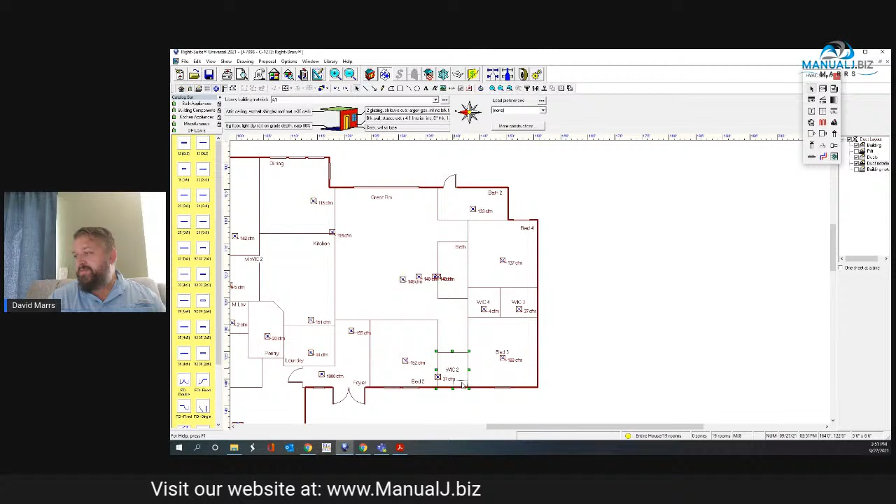I'm going to have a lot of ductwork showing, kind of coming up to the middle of this house, so I want to make sure all that is completely not there. All right, there we go. Just a few more. Get that up there.

Now I'm going to go ahead and put these grills where they're supposed to be. I know some of you are saying those grills are supposed to be right there in front of the windows, not everywhere. Everybody does it a little differently in different regions across the country. Some areas put it right up on that window, and others put it back, having it blow towards the window.

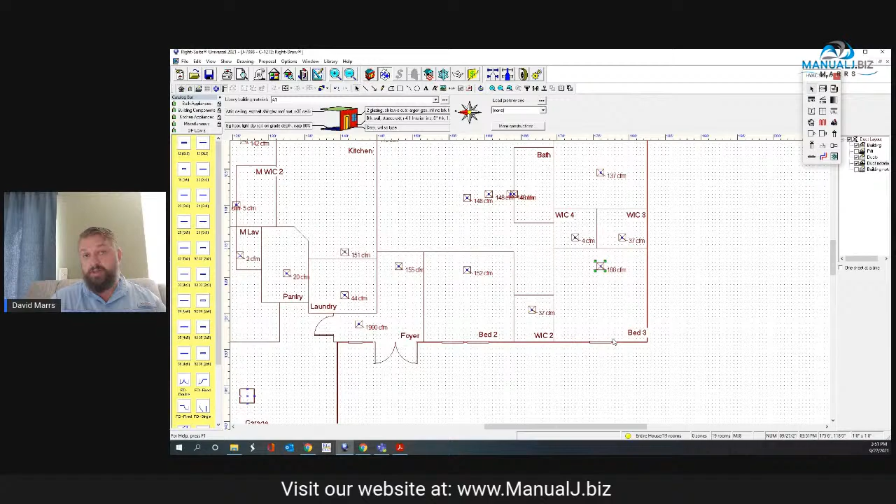Now, from my experience, which one is correct? If you're from an area that puts it blowing towards the window, you're going to say you're correct, and if you're from an area that puts them at the window, you're going to say you're correct. But truth be told, both work. I might gain a lot of haters for that one, but they both actually do work.

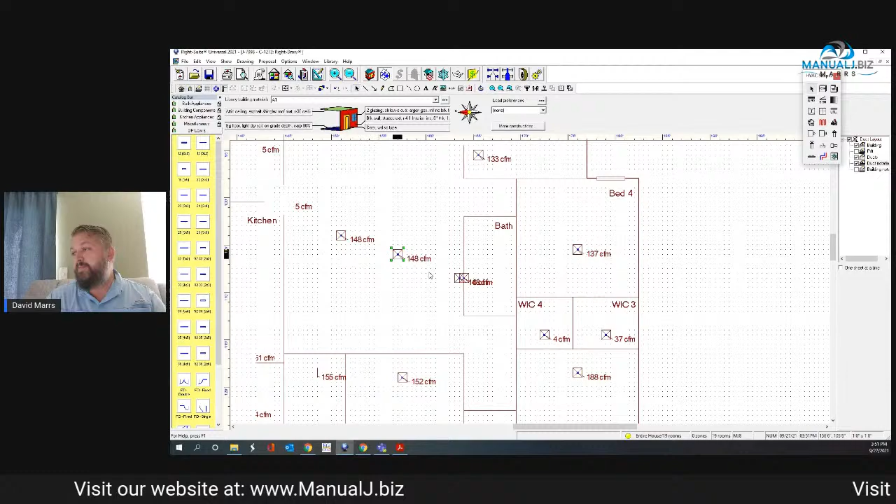All right, let's go ahead and put that there. That one there.

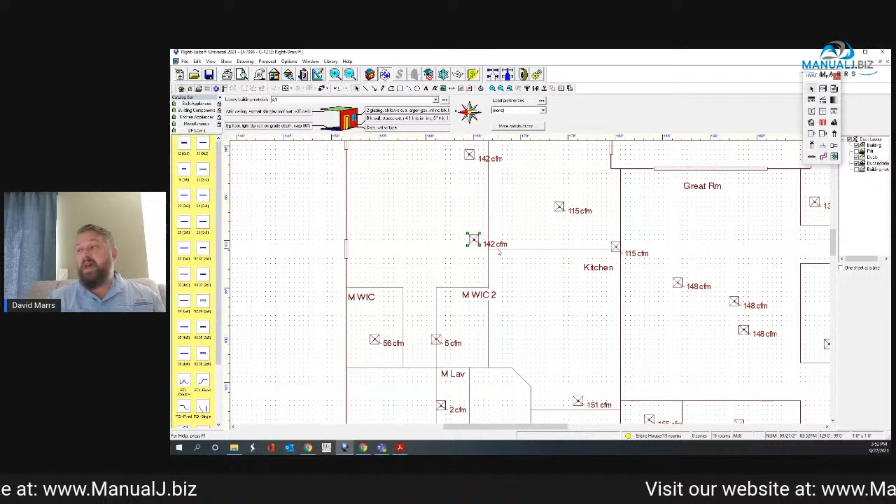In this one, I'm also making this more schematic than anything else. I'm not looking for exact locations with this particular builder because I don't have a truss plan. If I had a truss plan, I'd be able to see exactly where the trusses were located and put those things right where they need to be. This, I just need to be within reason. I can't be stupid about it, but I need to be right there within reason of where it needs to be.

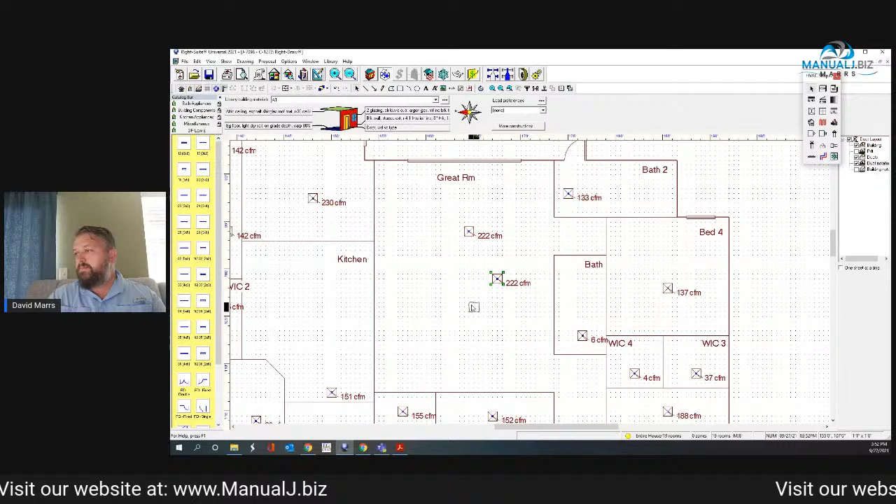Just getting rid of some extra ones that I don't need. All right, and that looks halfway decent.

Like I said, this is just to be quick about it and not 100% exact. There are plans that we do that are 100% exact, spot on exactly where the duct layout is going to be and where the grills are going to be located, because everybody does things a little differently and likes their work shown in a different way, and we cater to that. We make sure that whoever you are, contractor or client, we get it exactly how you want your work done.

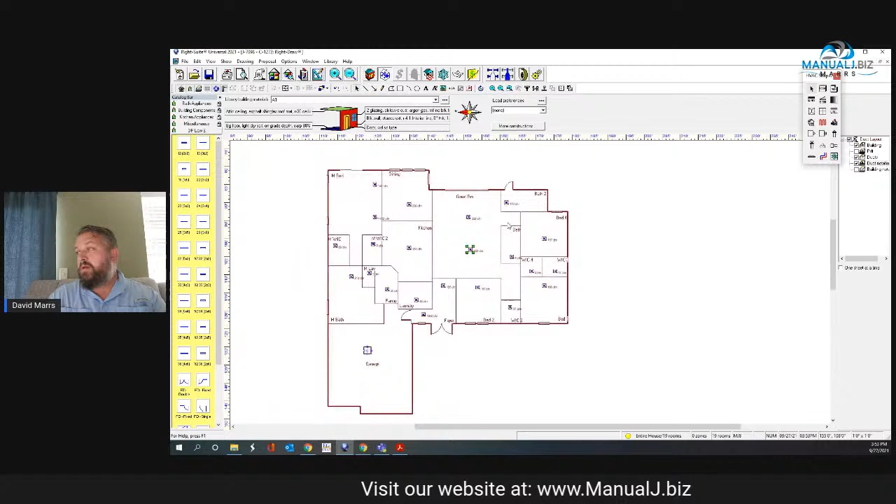All right, now let's go ahead, we're going to throw some returns in there. This particular contractor, we like to put returns in every bedroom, pulling directly back to the unit.

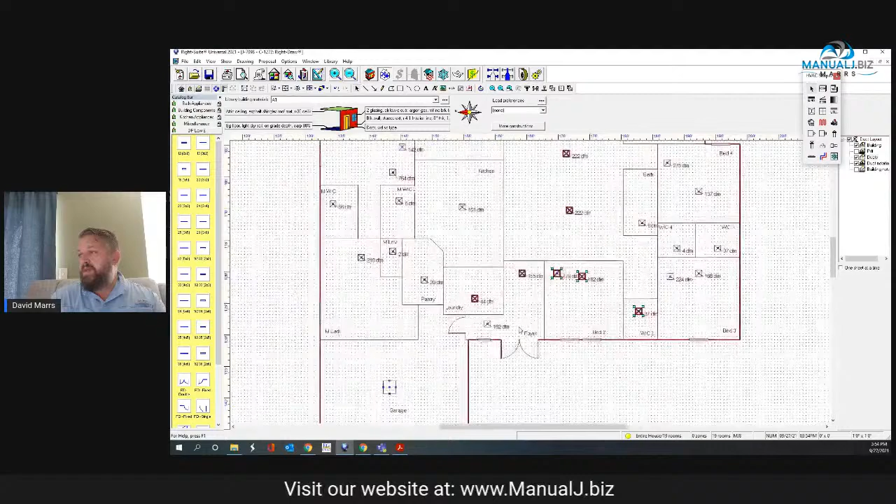They really got these things all discombobulated. There we go. There's that. That should be it. Look at that.

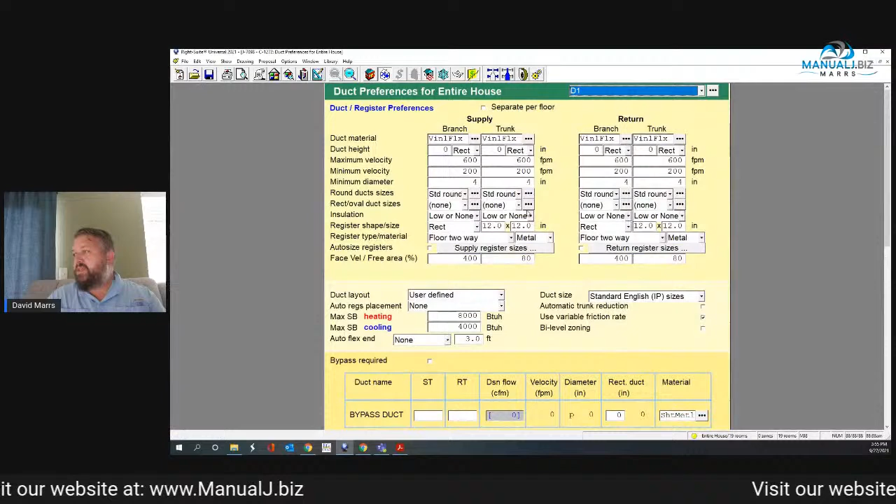All right, like I said, this is going to be a flex home. Florida, along with several others across the Southeast, are heavy, heavy, heavy with flex.

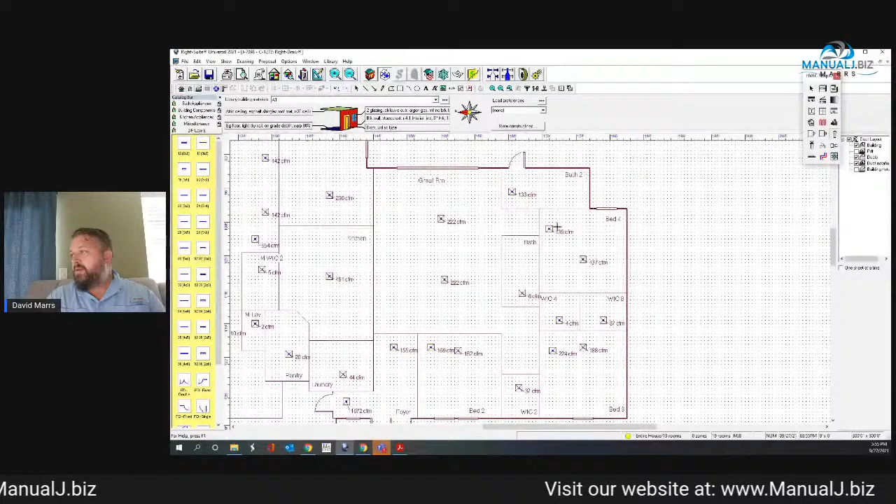Let's see, let's connect all of these from this side. Well, these closets make for a lot of branches.

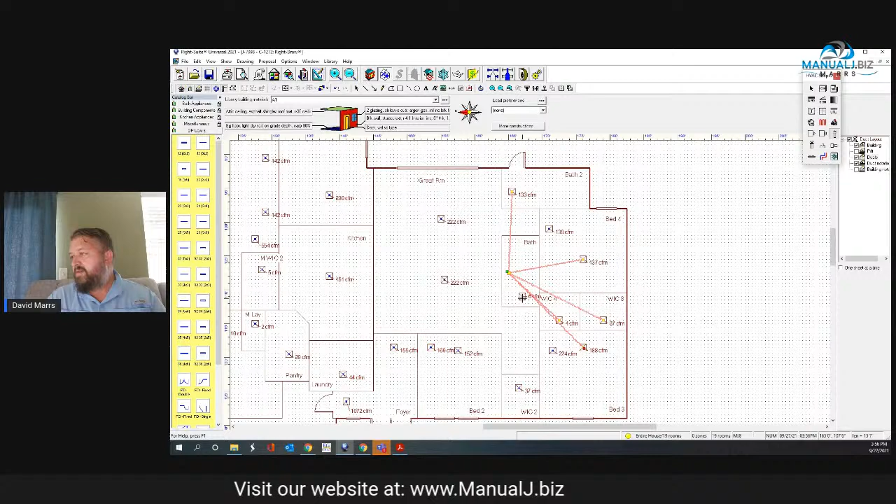There we go, 1, 2, 3, 4, 5, 6. I'm going to kind of get this whole side of the house right here. I never go more than 6 or 7 - 7 is really iffy for me if I ever do that on a flex system, because it's usually a lot of air. But a lot of these, 1, 2, 3 of these drops are going to be 4-inch drops going to the walk-in closet, so I feel pretty secure with that.

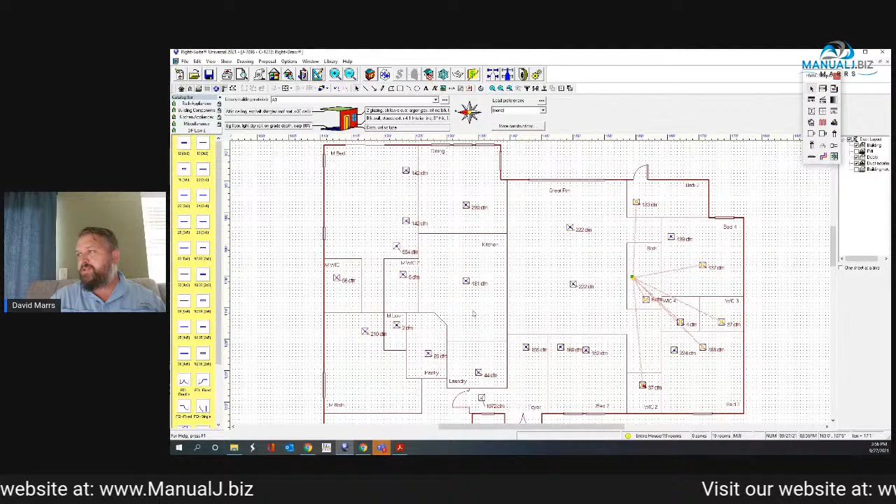All right, now let's see, I'm going to try and section off the master suite, section off the center of the house here. What I'd like to do is kind of set it up where it would look good for zoning.

Zoning, my personal view, is great, especially for a larger house like this - phenomenal thing to do for a home, for energy efficiency and for comfort. But comfort's the number one thing. You've got to make sure that whoever is going to be living there is going to be happy in their home. I think we've all dealt with unhappy people who aren't happy with the temperature of their home.

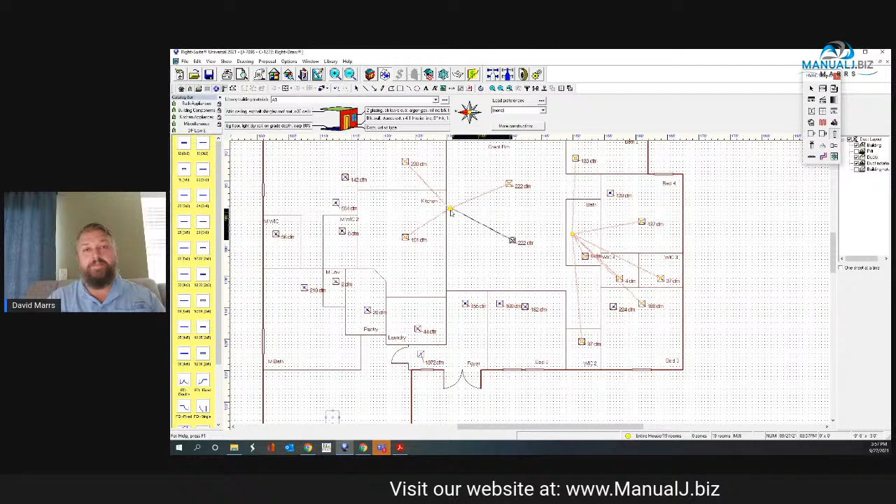And they're not easy to deal with. Of course, if I pay money for a house and I'm not comfortable inside my house, I'm not going to be easy to deal with either. So that's kind of one of those things - they have a good reason for feeling the way that they feel.

All right, so now I've decided I'm going to split this up because I'm going to add some more drops over on this side.

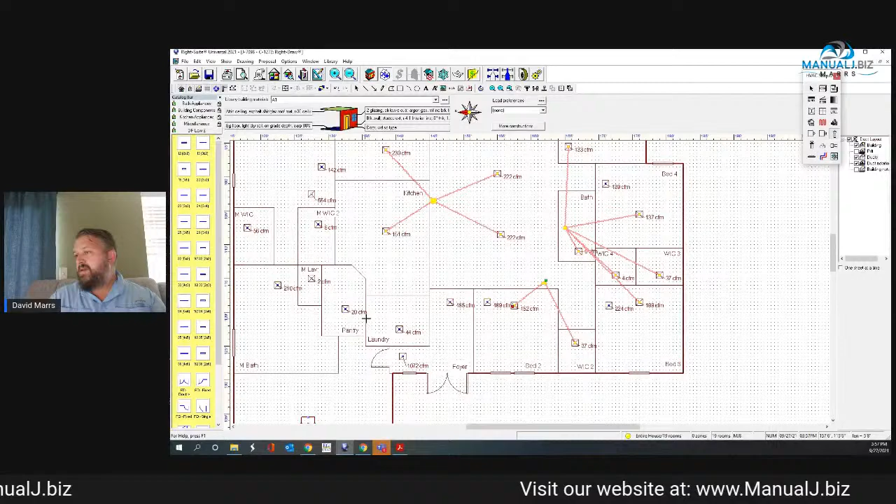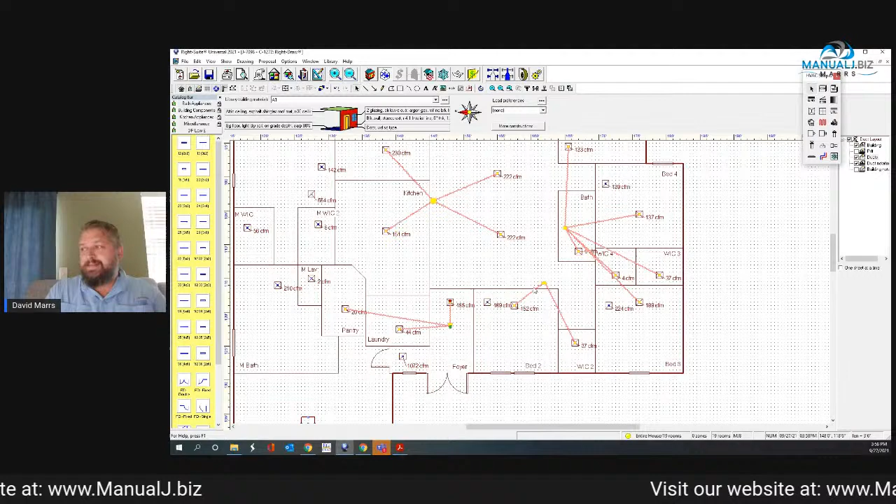I really don't want to have anything too long. That's one of the downfalls I see people do sometimes with flex. They'll be like, oh, I got a whole bag of flex that's 25 feet, I better use all 25 feet. But air takes the path of least resistance. The harder you make it for air to get to a location, the less likely it's going to go there. I can guarantee you that.

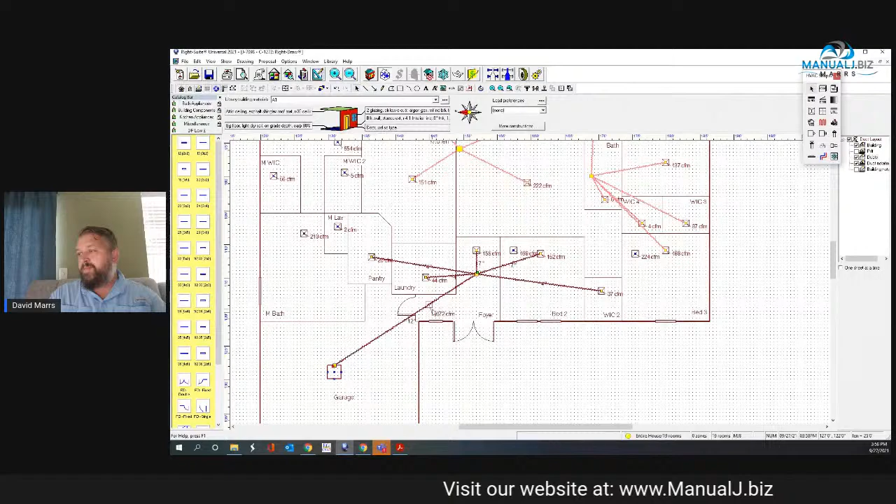I've been doing this type of HVACR industry work for a long time, and it seems to be one of the toughest things for people to understand: the harder you make air to get to one side of the house, or the harder you make it to do something, it won't go. It'll go somewhere else.

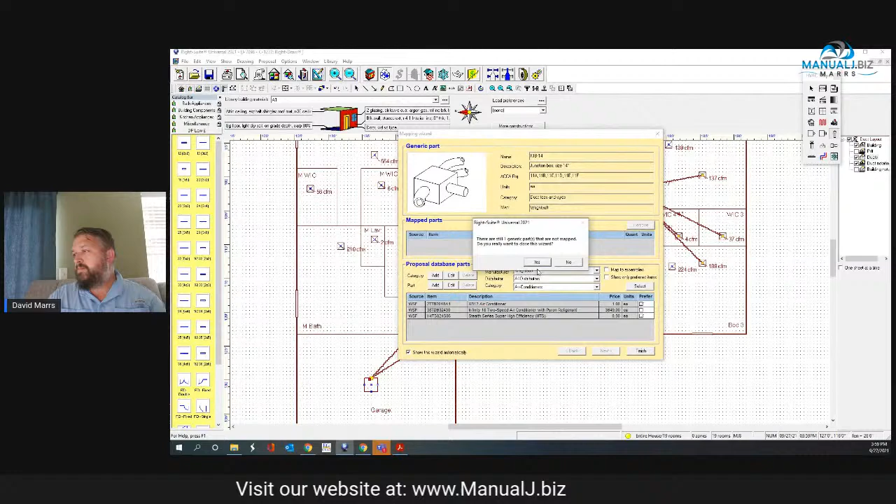All right, look at that. It's a lot of duct work. And doing it this particular way too, I mean, we could probably save on one of those branches coming along, going from one junction box and then skipping to the next. That is probably one of the worst ways of doing duct work.

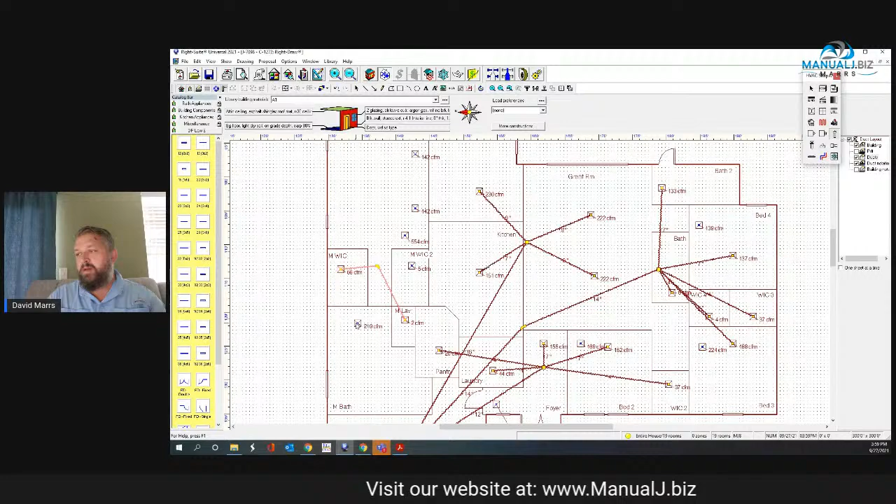You got to really, really know your installations for it to go from your main trunk line to one box, and then it goes off to another box, and you branch out and branches from your first one, and your second one branches out.

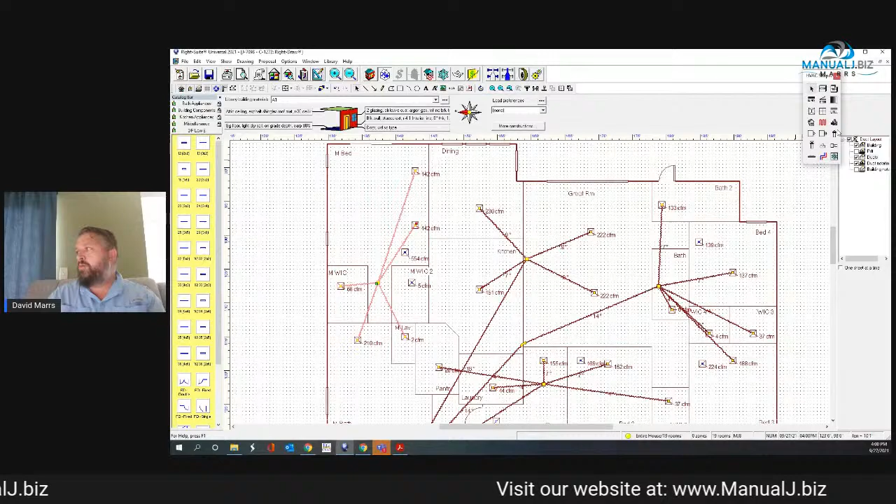I try to get as many contractors away from doing it that particular method, because from my experience, one company I used to work with did exceptionally high volume, probably several thousand new construction homes per year, and callbacks initially were horrendous just because of stuff like that.

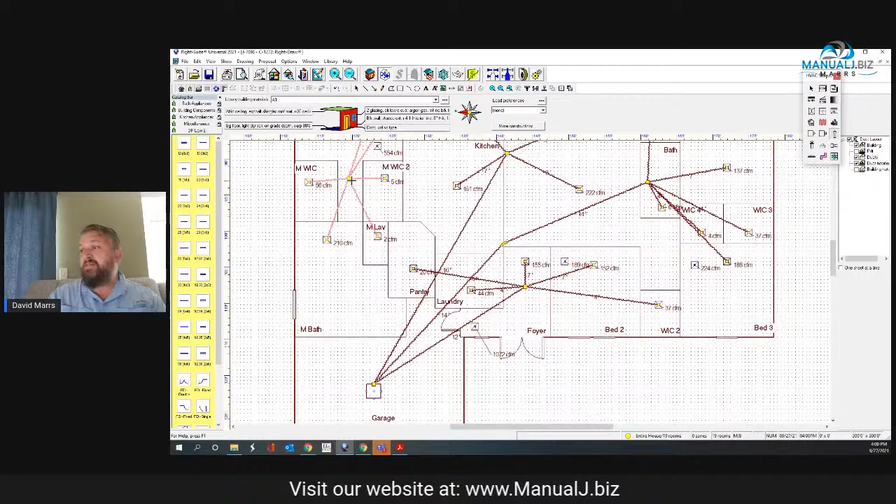When you really analyze it and go through trial and error of how to reduce those callbacks, what methodology you need to take, I found that when you have each junction box coming back individually, it resulted in phenomenally less callbacks than the other way.

I know, these three dudes, I'm going to put all three of these guys together. Now, I know I'm kind of stretching some of these out in the middle of the house and stuff, and it probably isn't going to be run like that.

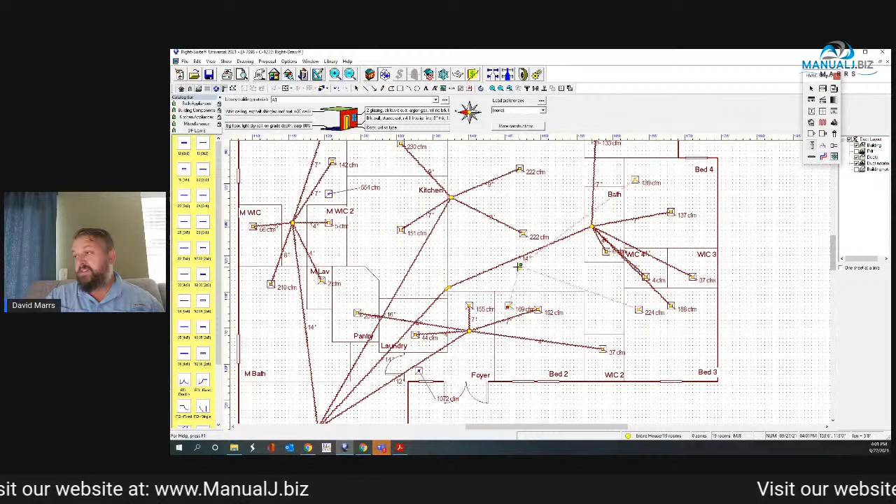That's fine. With this right here, the most important part of what I'm doing right now is that it can be read by the contractor and the installers for that contractor. If this can't be read, even if I had that truss layout, I might have to bump the duct a little bit, move it a couple feet up, that way my numbers can show and it's easy to see.

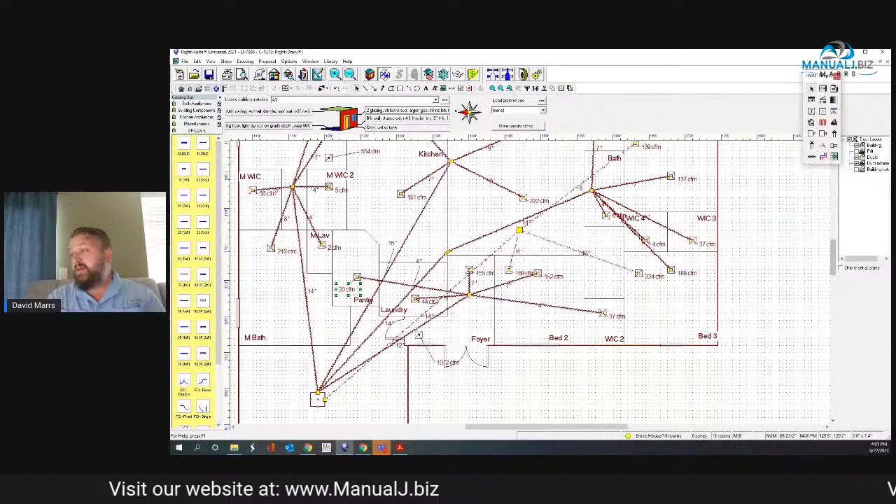It's not going to affect the duct sizing by doing that, but man, it'll save a lot of headaches. And when it comes to helping with the installers and the sizing, it's easier to get it this way first, easy to read, instead of fumbling around too much.

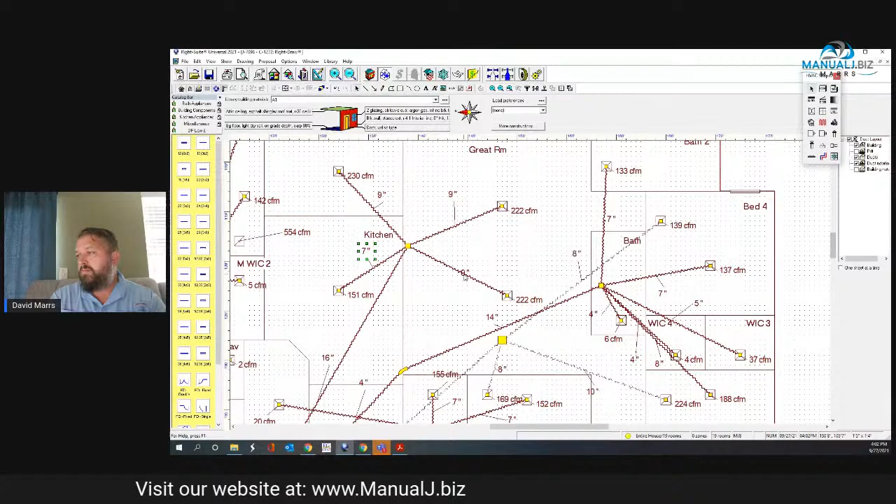All right. Look at that, we're getting close. Now I'm just moving some stuff out of the way. Again, you want to be able to read those numbers. All right, look at that, look at that.

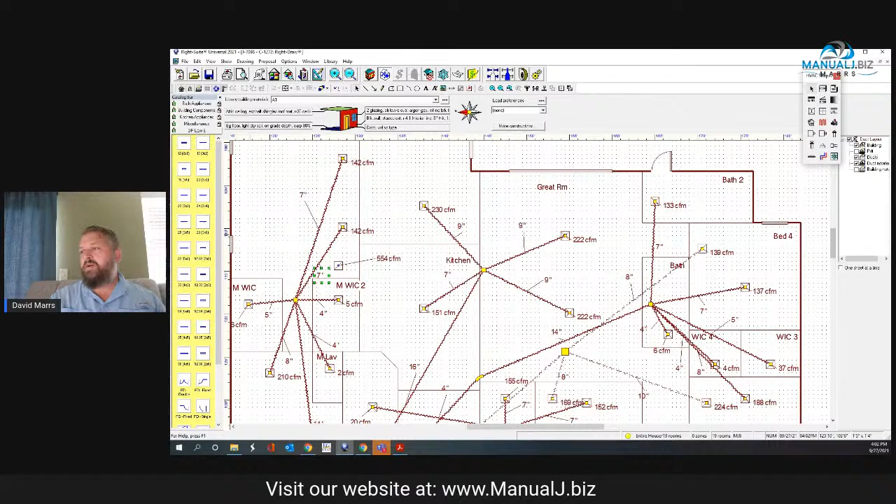Now in this one, I'm not worried about grill sizes. Sometimes I'll go ahead and put grill sizes, I'll even put little markers showing which direction the air is flowing. Not needed for this particular contractor, he knows how it's going to go in these homes. Me and him have had a really great working relationship for a very long time, so there's not going to be any issues whatsoever.

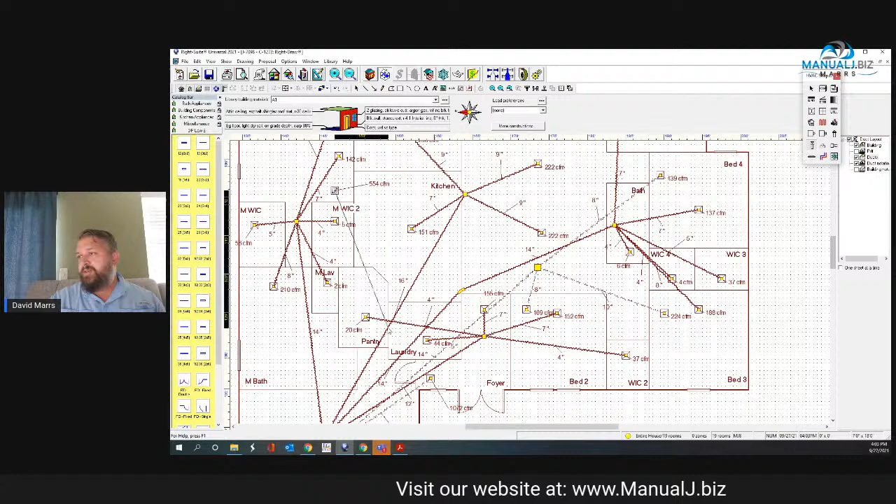All righty, so that is it right there. This is typical of what you'd see on a flex system, especially for a large house like this, this is a 2,600 square foot home. Oh, I just saw one drop I forgot to get. That little dude right there is just hanging out. There we go.

I know some people don't like it, but it is what it is. It's the construction, it's the industry standard for this particular area. Instead of me going on and on saying it doesn't work, it does work, it has to be installed correctly. And I'm not going to go tell one region of the country they're doing it wrong, because another region does things a completely different manner.

But that's the construction industry as a whole. Just to explain that to you, you got to be accepting of the different ways that everybody does things. There's more than one way to skin a cat.